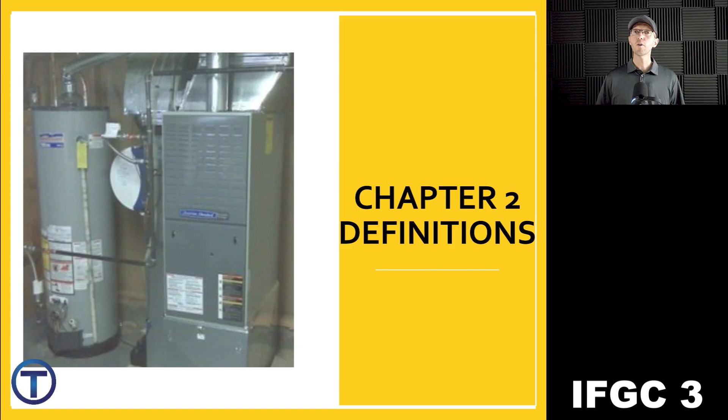And the definitions chapter for the International Fuel Gas Code has a lot of definitions that are important for you to understand. Words that are specific to the gas systems and gas piping systems that you would need to know in order to pass a test, but also to be competent as an installer. So make sure that if you don't understand any words along the way, that you go and check that out in Chapter 2, all about definitions.

All right, let's get into Chapter 3. We start out with just the basics. 301.1 is the scope. It says this chapter shall govern the approval and installation of all equipment and appliances that comprise parts of the installation regulated by this code. So anything gas, we're going to cover it.

This general regulations, again, is kind of a broader perspective. It's not specific to the pipe or the appliance, but like as we are installing these systems, how does that affect everything else? What specifics are required?

Now, 301.2 says that when it comes to energy utilization, it's important for us to go and look at the International Energy Conservation Code. That has the specifics about how we handle these installations in a way that will conserve energy. Let me maybe specifically state things like the proper insulation of a building, which is going to conserve or preserve the temperature that's inside of it.

So if we're going to heat the building and we have good insulation, that's good. And so those sorts of things are in the Energy Conservation Code, and they refer us to that because that's an important piece as we are using these systems.

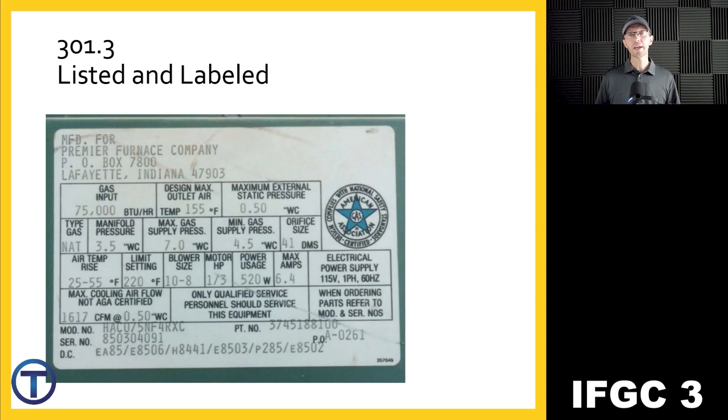Let's go on to 301.3, where it talks about listed and labeled. You can see here an example of an old plate, information plate that's on the side of a furnace. 301.3 says that appliances should be listed and labeled. We have to have that specifically there so that we have information about that appliance. 301.4 talks about the labeling, and it says it has to be done in accordance with that section. There's some testing requirements and some inspection and identification requirements listed in there.

Let's go on to 301.5, which gives a list of the specific information that is required on any of these labels or nameplates. And there's quite a bit here. First of all, it has to be legibly written, and so legible lettering. That means you can see it and read it easily. Then you have the manufacturer name or trademark. We need to know who made it.

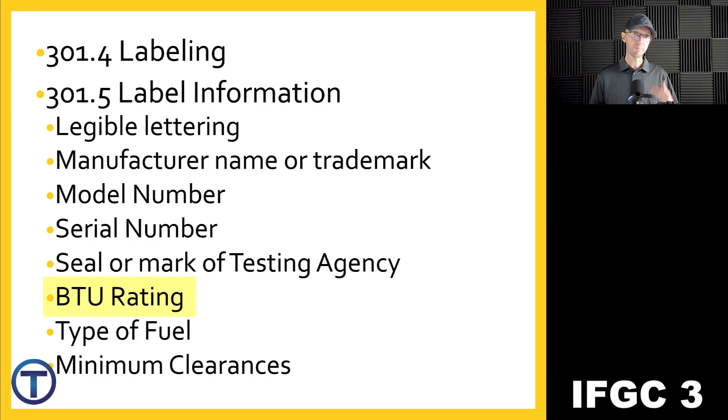Then we have the model number and the serial number. That's going to be specific to the appliance and help us identify that appliance. Then we have the seal or mark of a testing agency. So that third party that comes in and says, yeah, we've checked these appliances and this one passes certain standards. It should also have listed the BTU rating, the type of fuel, and the minimum clearances you have to maintain around the appliance. Well, that's quite a bit of information, but all very useful as we're doing installation.

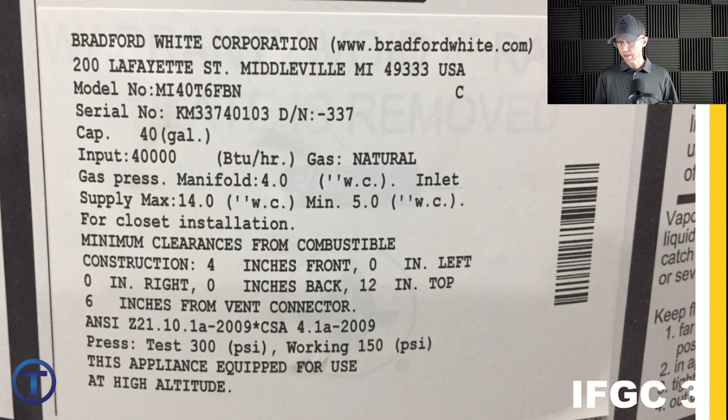All right, I have a little exercise for you here. This is the label for a Bradford White natural gas water heater. Just took a picture of a water heater that was installed, right? What I'd like you to do is look closely at this image and see if you can identify all the things that should be on a label. I'm going to list it off. You look for it. Here we go. First of all, it should be legibly written. So yeah, hopefully you can read this. Look for the manufacturer's name or trademark. You see that on there?

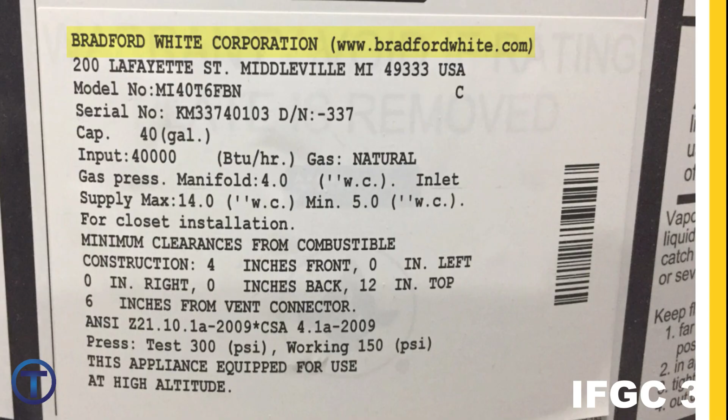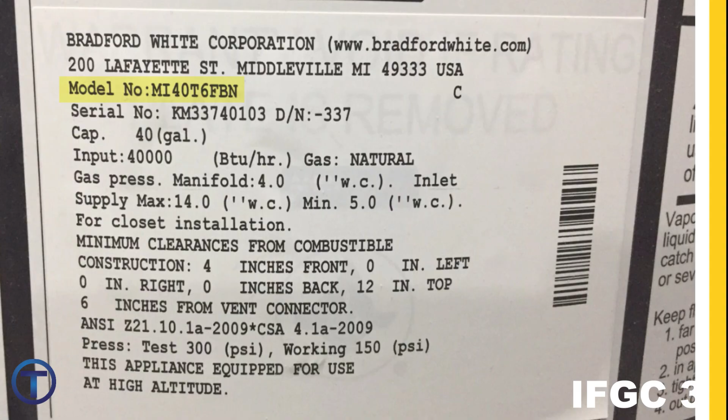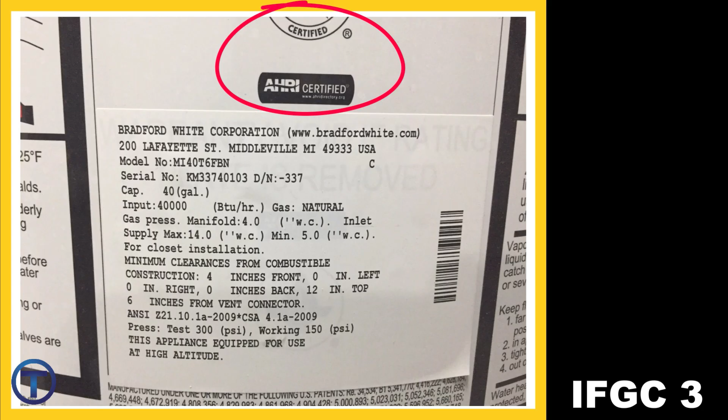Next, look for the model. You see where the model is listed? How about the serial number? There's also going to be the seal or mark of the testing agency. Can you see where it's been certified? Now on this one, there's actually two. The top part got cut off there. It says certified. There's a stamp above that, and then there's the AHRI certified. So several have looked this over to make sure that it's meeting standards, right?

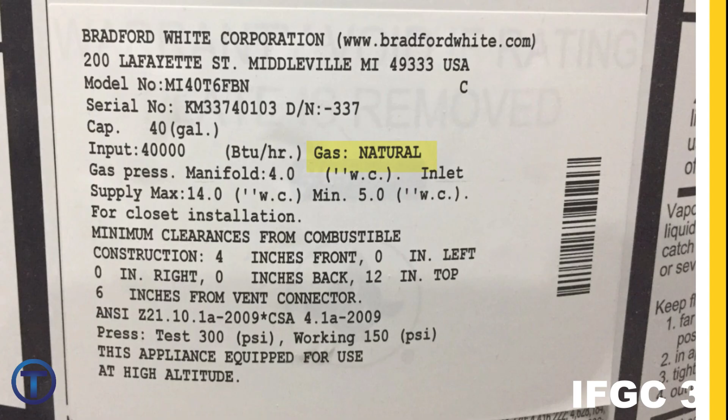Look for the BTU rating. Do you see where it lists out the BTUs for this particular water heater? What about the fuel type? Can you see where it says that this is natural gas? And how about clearances? It specifically spells out clearances in front, to the right, to the back, from vent connector. So those are all important.

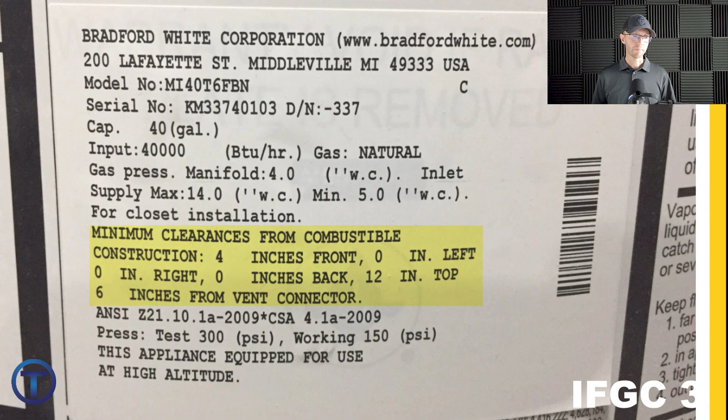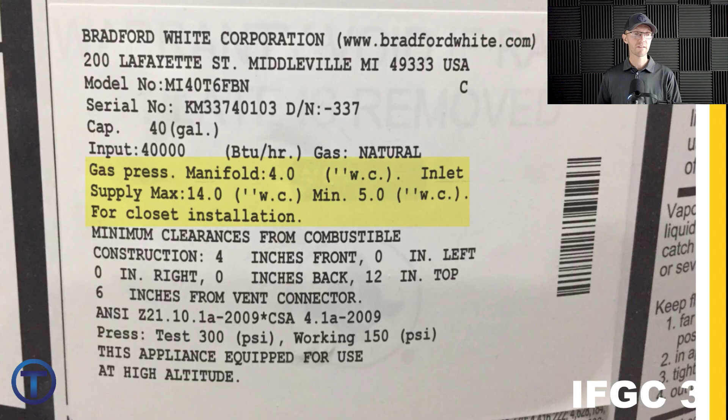Now, in addition to that, as we look this over, there is more information than what was required, right? It says that here the capacity is 40 gallons. You don't have to put that on there, but it's there. Other information, the maximum supply or gas pressure at the manifold. Also, this one specifies it's for a closet installation. You can put it in a closet. Check this out at the bottom. This appliance is equipped for use at high altitude.

What does that tell us? That tells us that the orifice in the gas valve has already been adjusted for the gas difference at higher elevation. And we get into that later in chapter 4. I'll explain how that density changes as we get into higher altitudes. But just pointing out here, you can't install this water heater at sea level. It's not going to work right. And you can't install a water heater that's made for sea level at higher altitudes. It's not going to work right.

I think it's good for us as plumbers to be able to look for this information about appliances, especially as we get into gas sizing. You need to know about each appliance, and this is where you look on the label.

Wait, stop everything.

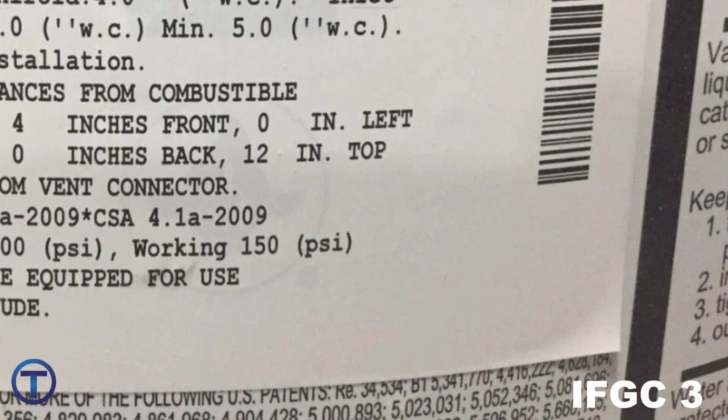Do you see that? Look closely in the corner here. The sticker is peeling. Yes, labels are sometimes actually just stickers. And let me warn you, you do not want to peel that sticker. As much as the corner may be calling to you and asking you to peel it off of the tank, don't do it. It will void the warranty.

All right, moving on to 301.6, it talks about plumbing connections. There are appliances like a water heater that have to have connection to the plumbing systems. In those situations, it says, look to the International Plumbing Code for details as to how that should be handled. As plumbers, we should know that really well.

301.7, fuel conversions. Appliances often are able to convert from either natural gas to propane or the other way. And it comes down to the orifice. An orifice is a small opening that allows the gas through into the burn chamber. And there's a difference on how much gas you want to allow, whether it's natural gas or propane. So basically, it's just a different size hole. And many appliances can be changed or converted from one to the other.

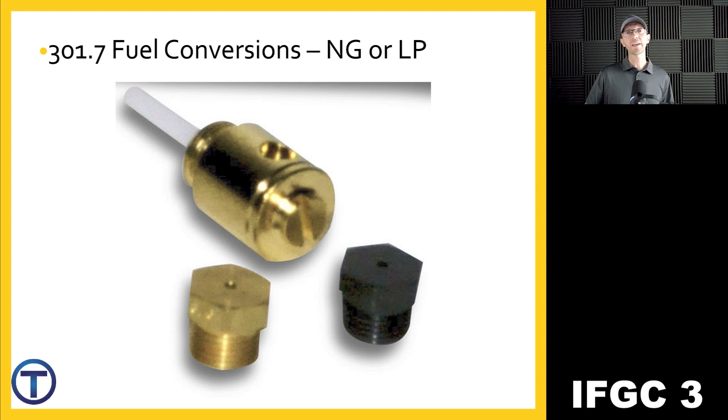On the other hand, some appliances are made from the manufacturer set for one or the other. Water heaters often come either as a natural gas or an LP propane water heater. So you want to make sure you're getting the right one when you install. But it's important to understand that you can make those conversions.

One example of doing a conversion is the Navien tankless conversion kit. Most of the Navien water heaters have that kit right in them. So you can install and then just open it up. It has a simple instruction. You swap out the orifice, seal it back up, and then tell the computer you've gone from natural gas to propane, and it's ready to go on the other gas.

Now, if you don't, on any of these appliances, just warning you, you could destroy it very quickly. A propane system with a natural gas water heater will burn up the heat exchanger and destroy the water heater. So make sure you get that right. 301.8 talks about vibration isolation. Some appliances or some equipment's going to have some isolation so that it doesn't transfer noise into the building.

301.9 talks about repairs. If we're repairing any of these gas systems, it says defective materials or parts shall be replaced or repaired. Anything that we know is defective needs to be corrected. 301.10 talks about wind resistance. 301.11 talks about flood hazard areas in regard to how these systems and appliances are installed. 301.12 talks about seismic resistance.

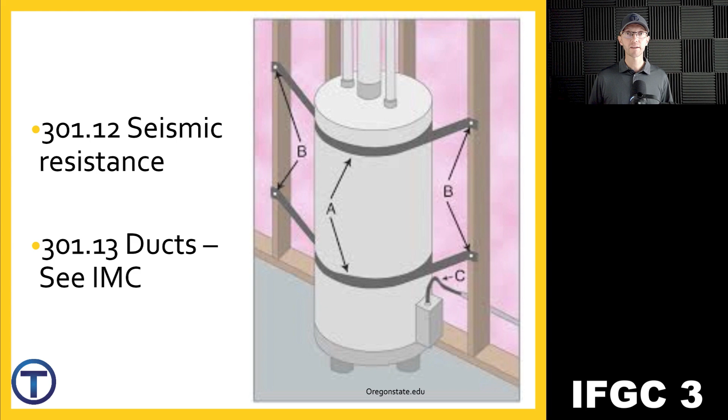And there are some seismic, meaning earthquake proof, right? We're going to set this up so that if the water heater's in an earthquake, it doesn't just fall over, bust all the lines, and cause a bigger mess than it's already going to be when there's an earthquake, right? 301.13 talks about ducts and refers us over to the International Mechanical Code. 301.14 talks about rodent proofing.

It is not uncommon as we're installing these systems to create a sidewall penetration or somewhere that we've made an opening from the outside of the building into the building where rodents can get in, or other little vermin, insects, whatever. So this section emphasizes the importance of closing up, sealing up, making sure that whenever we penetrate a building, it's not going to be an opening that would allow rodents in.

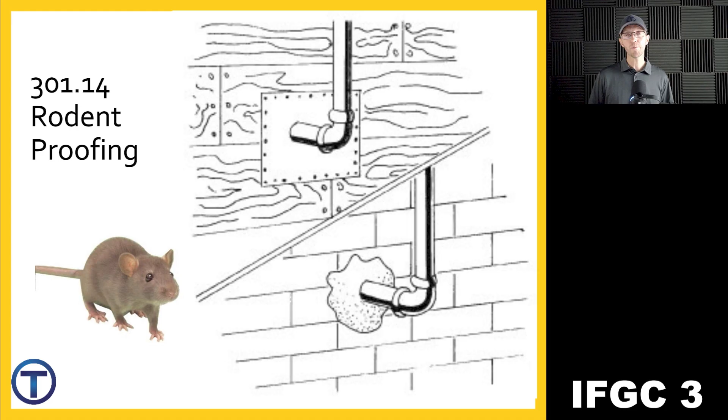Ooh, I love people food. Yeah, people food's the best. I say we move in with these people. Yeah. Hey man, you got cake on your face. So do you.

301.15 gives us prohibited locations and specifically elevator shafts. We see this in the other codes, the International Plumbing Code. Elevator shafts are designed specifically for the elevator and its equipment. And even though it looks like a great place to run pipe because it's got this wide open chase all the way up, it's not for us.

Let's go on to section 302, which is about structural safety. This section of structural safety is comparable to what is in the International Building Code, but it's also in the back of your International Plumbing Code in Appendix C. So in each of these codes where we're going to be installing piping systems into an existing structure, they want to make sure that we're not going to destroy the structure or the strength of the building as we install those pipes. Let's have a look. 302.1 says, the building shall not be weakened by the installation of gas piping.

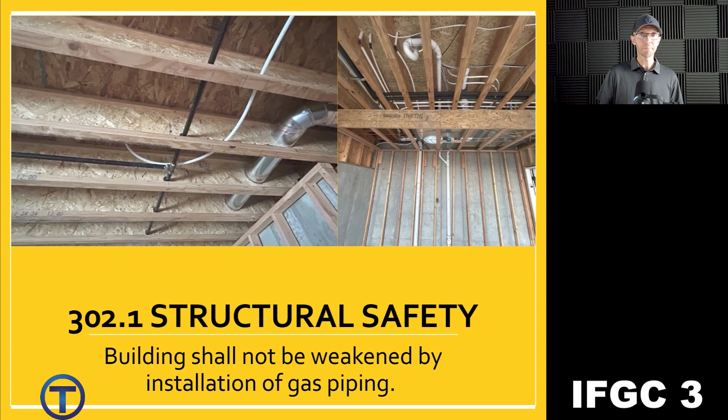So if I'm running pipe, I'd better not be hacking things apart to where it could be a structural problem, like the building's not going to hold the weight. 302.2 talks about penetrations of floor or ceiling assemblies and fire-resistance-rated assemblies. There are some buildings with designated spaces that have divisions or firewalls to contain a fire so it doesn't spread throughout the building. Anytime we penetrate those firewalls, we're going to have to do something. Many times it's just caulk, fire caulk around the pipes. But something has to be done.

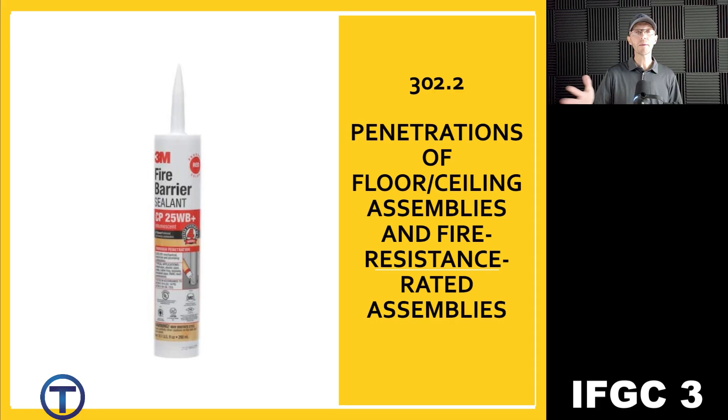302.3 talks about cutting, notching, and boring in wood members. Now, there's a lot here, so let's get into some of the details. 302.3.1 talks about engineered products. We're talking like joists, I-joists, or glulam beams, or other things that are manufactured and are made of wood. Before we drill through these or alter these structures, we need to make sure that we understand what the manufacturer requires as far as size of holes and distance from bearing walls and things like that. I'm not going to go into all the details of that, but just know that engineered wood products have those specifics, and we should be aware of that.

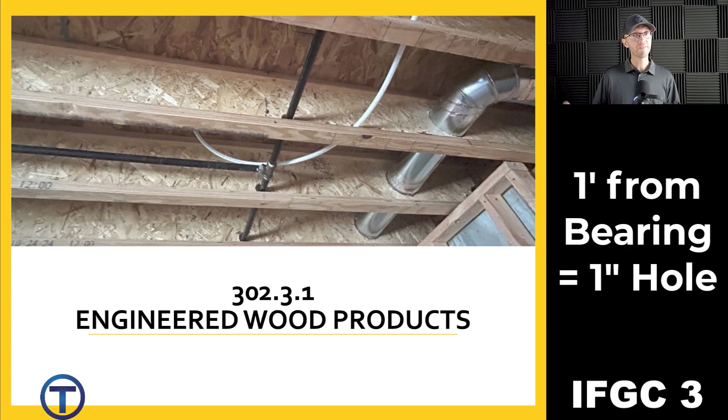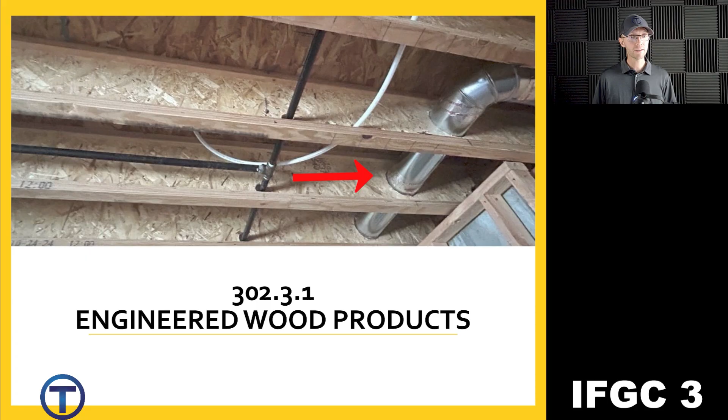A simple rule of thumb for plumbers would be for every 1 foot that you are away from a bearing point, you can do a 1-inch hole. So if I have a 4-inch hole, I need to be 4 feet away from bearing point. Now, as we look at this picture, there's a duct that's been run right by the bearing point within a couple of feet. Probably not meeting that standard, but again, we'd have to look into the manufacturer's requirements and see if that works.

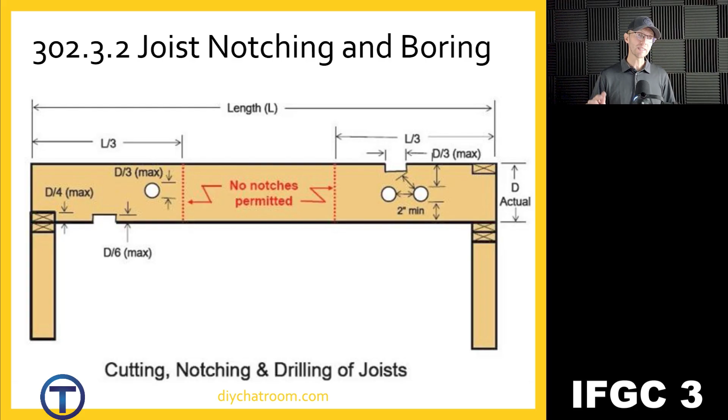Let's talk for a minute about solid wood joists. This is older construction, houses that were built many years ago, they do solid wood, but this still can be installed and used. So here we go, 302.3.2. When it comes to joist notching and boring, there are certain specifics as to what we can and cannot do. On the top of this diagram, we see the length, overall L, and then on the right side, we see the actual depth, the dimension D. Now, there are certain places that we can and cannot go. Notice in the middle that we are not allowed to drill, notch, or do anything in the center third of the joist. We can on the right or left.

If we notch into it on the underside, we can only go 1/6 of the depth of the joist. Notching overall is just not a great option, seriously. Drill a hole or find something else to do. If we're going to drill a hole, look at this one, it has to be a maximum of 1/3 of the depth of the joist. So if I have an 8-inch joist, well, that's only going to give me about 2.5 inches. I shouldn't be running a big 3-inch pipe through there.

Look over here on the right side. Once again, if we're going to notch, we're not talking about depth on this one. We're talking about the width of the notch. It can only be 1/3 of the depth of the joist. So we see a limit on how deep we can go and how wide we can go. As you chop into that, you're really weakening the structure of that joist. Okay, a couple other holes here. They have to be 2 inches away from the top at a minimum, 2 inches from the bottom, and 2 inches from each other as we're drilling through.

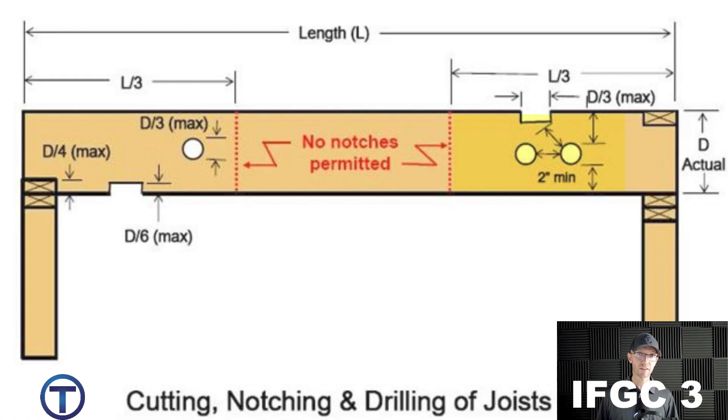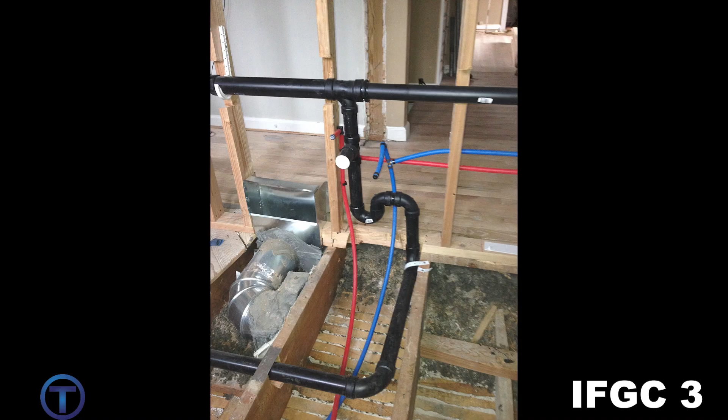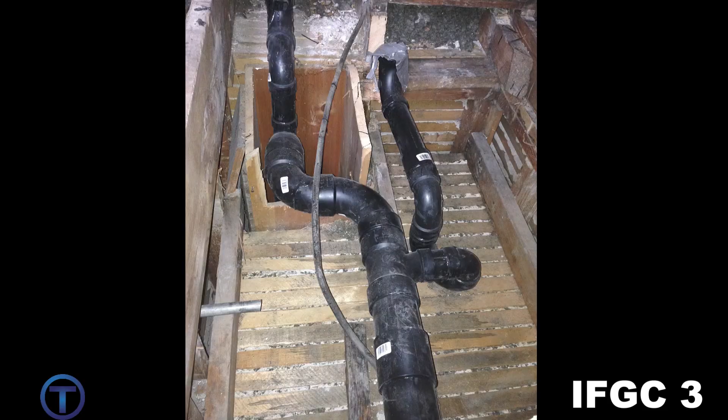Luke, you must look at the terrible damage to these joists. Behold the awesome destruction of incompetent workers.

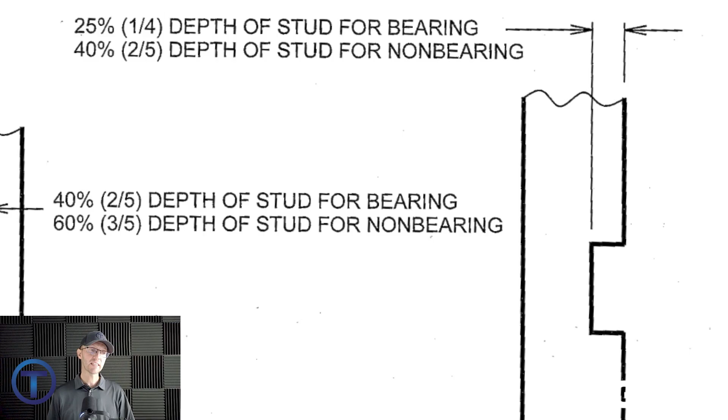Notching. If we're going to notch into the face of a stud, you can go 25% on a bearing wall. If it's non-bearing, that means it's just a partition wall, we're going to hang sheetrock on it, you can go 40% on a non-bearing. Now we can create a bigger opening for a pipe if we drill it. Drilling a hole, or boring a hole as they say in code, leaves a better structural strength.

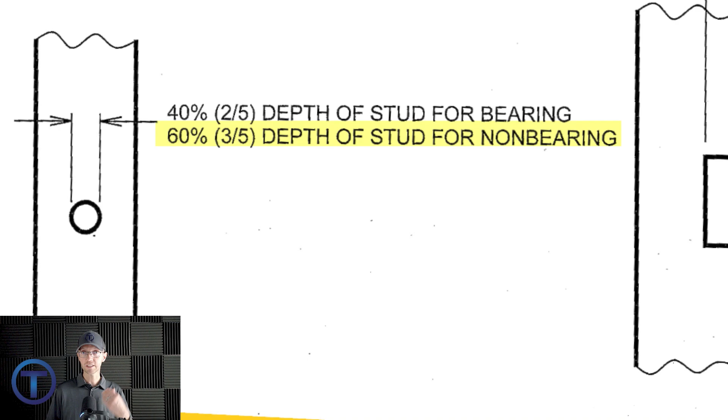So we see on the left side here, you can drill a hole that's 40% of the depth of the stud on a bearing. And on a non-bearing, you can go all the way up to a 60%. So these proportions are really important for us to remember as we're going in. If we take out too much, if I notch out more than half of that stud, it's not going to be strong enough to hold like it should.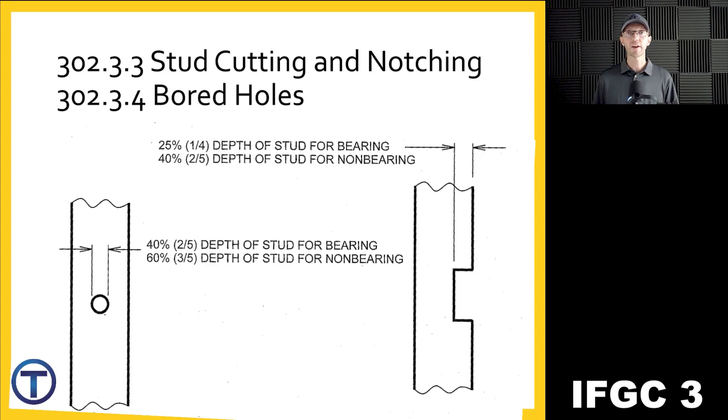If I drill a hole that's too big and takes out 70% of the stud, what's left? I mean, why is that stud even there anymore, right? You thought I was done, but I have more for you to see.

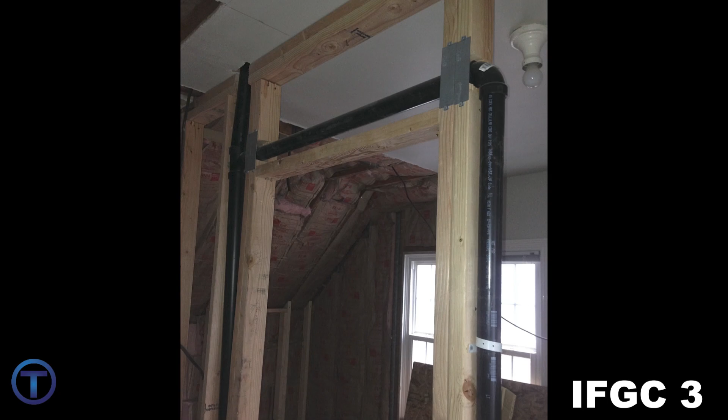Now that might bring us into a whole different discussion about like, hey, framer or even architect, why don't you give me a wall that's thick enough, if I got to put plumbing or pipes through this, thick enough that when I drill it, I'm not going to have these problems with structure. That'd be nice. Give me a 2x6, a 2x8 wall. If they're giving us 2x4, sometimes it's really hard to meet these requirements.

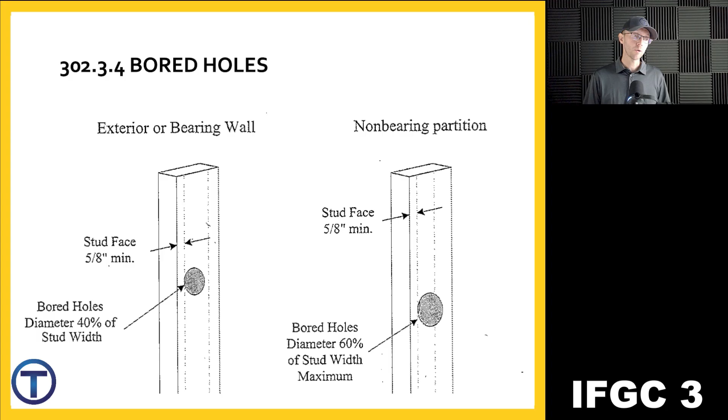One other point as we look at the drilled holes or bored holes is that you must stay away from the face by 5/8 of an inch. That's a little more than a half. You just want to make sure that there's some structure at the face as we're drilling through those holes.

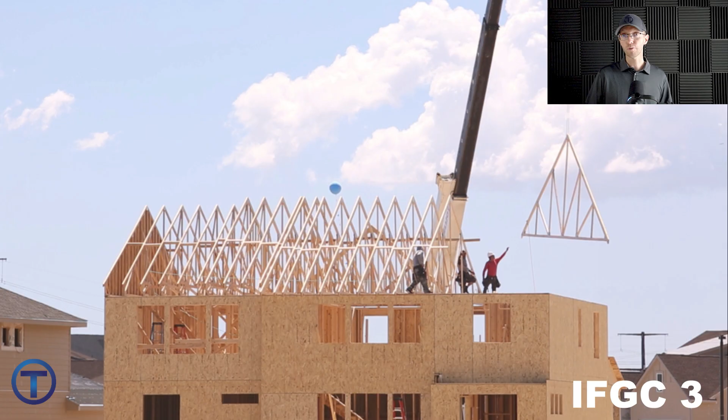302.4 talks about alterations to trusses. Trusses are often used either for floors or especially for roofs, and they are very important structures. If you affect them in any way, they will not be strong enough to do their job. So when it comes to alteration of trusses, it says that truss members and components shall not be cut, drilled, notched, spliced, or otherwise altered in any way without written concurrence from a design professional. So if you really have to, which I don't see any reason why you really have to, there's other ways around this, but you shouldn't touch them unless you've talked to a structural engineer.

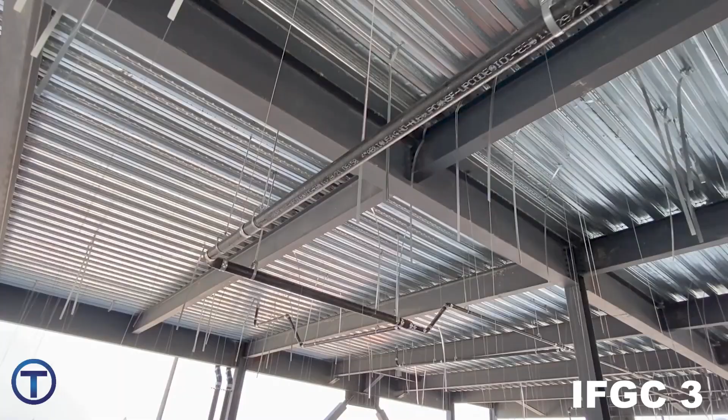We've talked about wood. Let's talk about metal buildings, often seen in commercial settings. 302.5 and 302.6 go over the cutting, notching, and boring of holes in structural steel framing and cold-formed steel frame members. If we want to summarize what's in those two sections, basically if you're going to alter these steel structures, you have to get that permission. Same thing, talk to an engineer. Code says it has to be as prescribed by a registered design professional. That means the engineer said, yes, you can do this.

Now, on a building, the steel, hang below it, right? There's usually ways around it. We don't very often have to go blasting through steel.

What about steel studs? 302.7 talks about cutting, notching, and boring holes in non-structural cold-formed steel wall framing. So when they put up these steel studs, when it says cold-formed, they roll out the steel and then stamp it into the shape of the stud, and then they usually poke some holes in it, right? If those holes line up for us, great. That works for electricians. But most of the time for us, as we're sloping pipe or moving water lines through, we have to create our own holes. So if that's the case, keep in mind the requirement for holes here for these studs to maintain structure.

It says the hole should not exceed 1.5 inches in width and 4 inches in length. It also says that they should be spaced out 24 inches center to center and should not be less than 10 inches from a bearing point. That would be from the bottom end or top end of the stud where it's connecting and bearing.

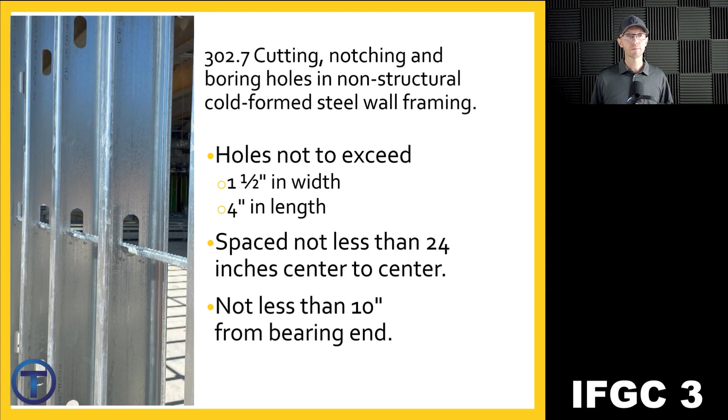So, what does that do for us as plumbers? Sometimes we have to poke holes in these. Best to spread out the holes if you're going to be running water lines and drains through there. And do your best to maintain the sizes. It's the same thing as we talked about with wood. I mean, if they're giving us 2x4 inch steel studs, and we're supposed to put a bathroom group in there, what do you do? You do your best, right?

All right, so we've covered section 301 and 302 in the International Fuel Gas Code in Chapter 3. And we talked about some of the general stuff and the structural safety, trying to maintain the building.